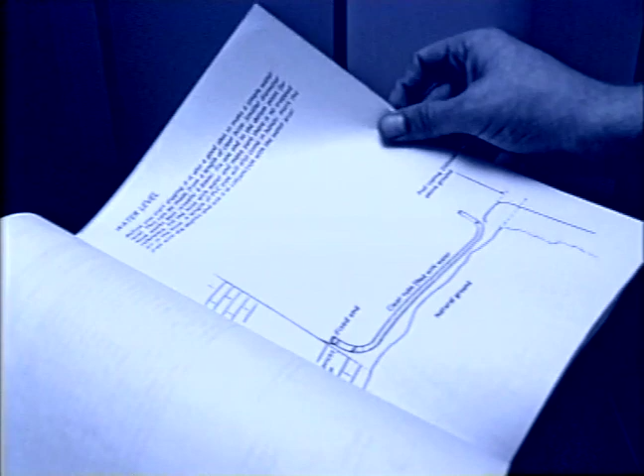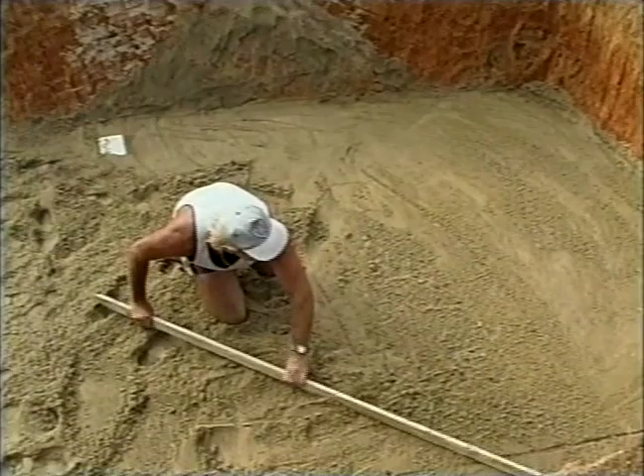Do-it-yourself pool installation is made easy with Narellan Pools kit installation booklet and video. The booklet is an easy-to-use step-by-step guide with comprehensive technical information that covers the main aspects of pool installation. The video is a visual aid showing you a real pool installation and highlighting the techniques used during each stage of installation. Remember, if you get stuck and need advice, we're only a phone call away.

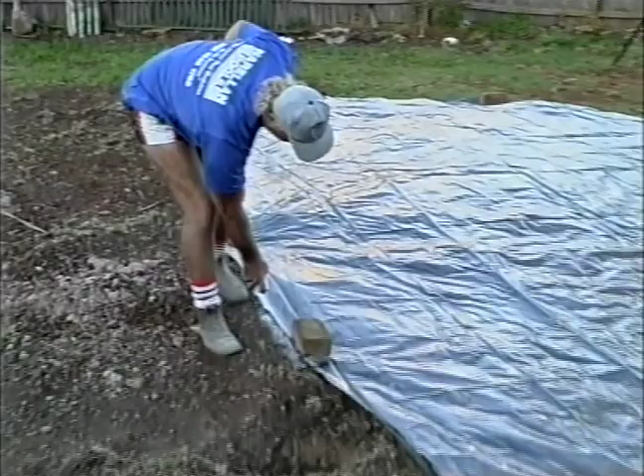Firstly, decide where you would like your pool. Prepare the site by levelling the area and then lay out the pool template. Mark the position of the template using white paint or by spreading lime around the edge. This is so you know exactly where to dig. Measure all your levels with a dumpy, laser level or water level, all of which achieve the same result.

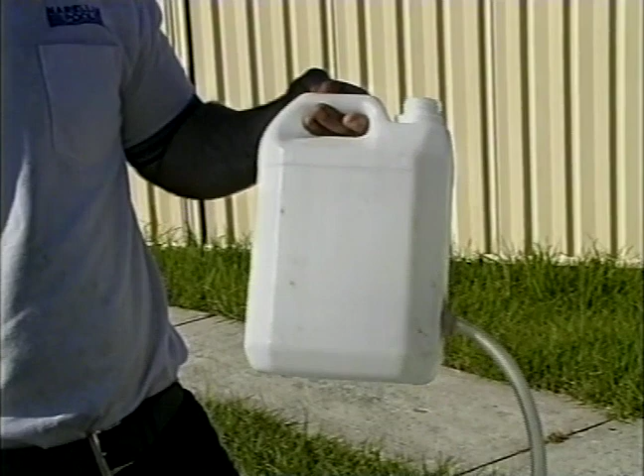To make a water level, you'll need two things: a clear plastic bottle or container and a 15-metre length of 5 to 10 mil diameter clear hose. Connect the hose to the container and fill it with water. Using coloured food dye in the water will highlight the water level in the clear tube and make it easier to see.

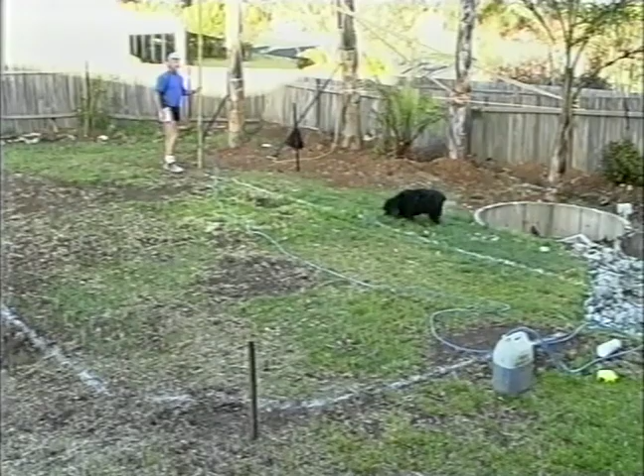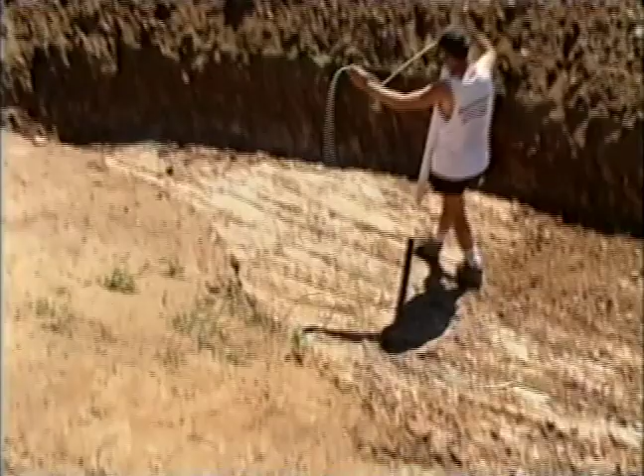You'll notice that wherever you take the clear hose, the water level will be the same as it is in the container. A length of PVC pipe will also come in handy. Use a tape or a texter and mark the shallow and deep end dig depths on the pipe. Use the pipe along with the water level to check your dig depths during excavation.

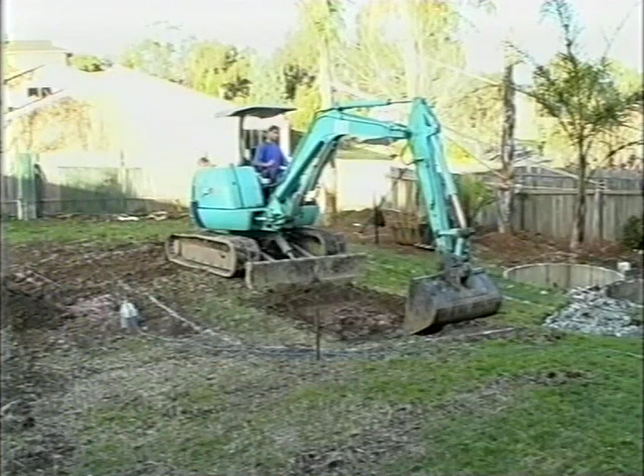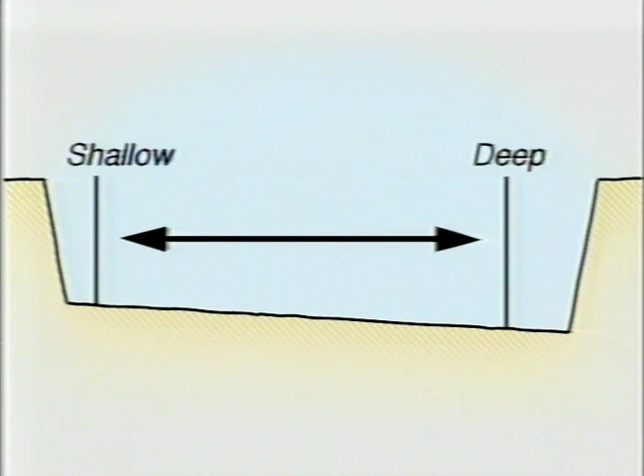For your pool coping to be level upon installation, your excavation must have the correct slope from shallow to deep. To achieve this, the distance between the shallow and deep end dig depths must be correct. The distance between these 2 points is called the pool floor measurement. You can find the correct pool floor measurement for your pool in the installation booklet.

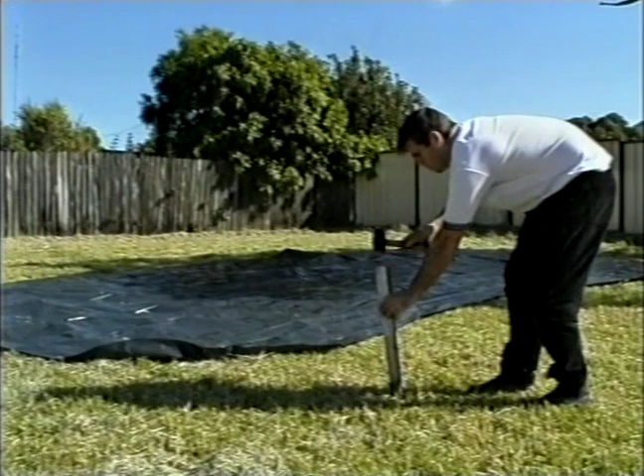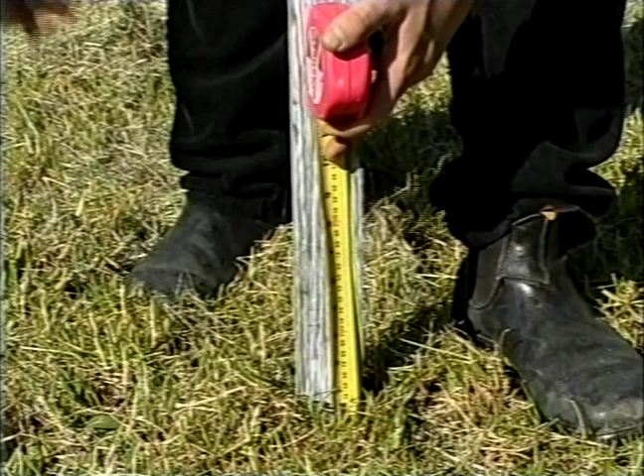Hammer 2 pegs outside the excavation area to mark the shallow and deep end dig depths with the correct distance between the 2 pegs. Before you start digging, you'll also need to establish a finished height for your pool coping. Keep the pool coping height at a minimum of 150 millimetres above natural ground level to avoid any possible drainage or hydrostatic problems in the future.

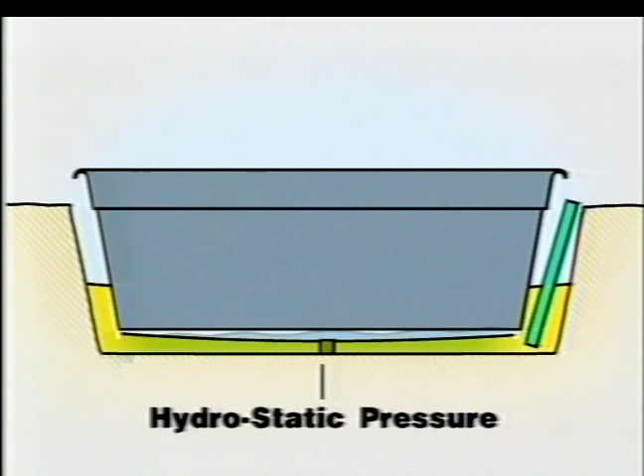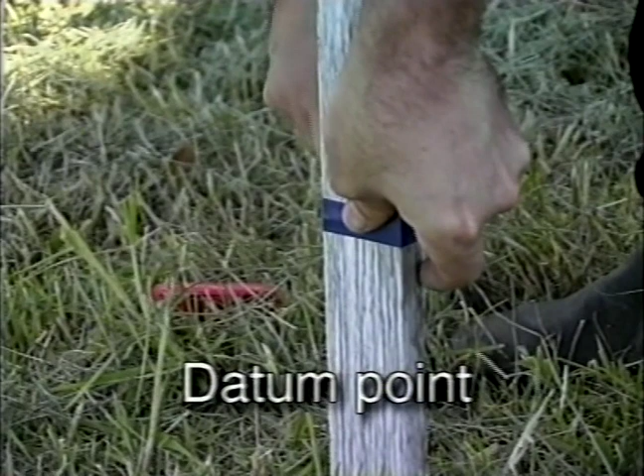Mark one of the pegs you are using for dig depths with the finished height. This is called a datum point. Refer to this point when checking all measurements and levels to ensure consistency and accuracy throughout your installation.

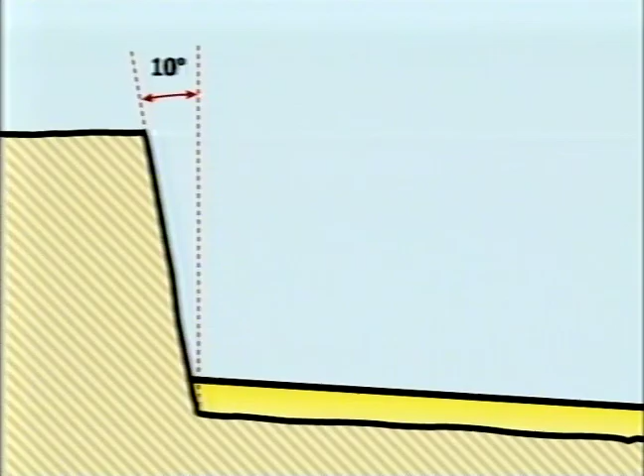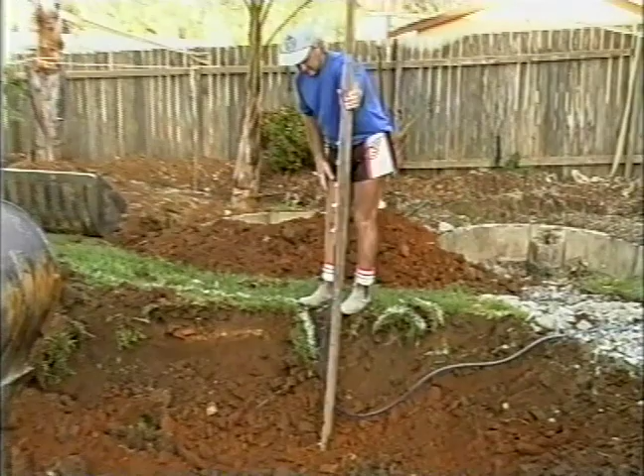To allow for the gentle wall slope of the pool, your excavation should also have a taper of about 10 degrees to eliminate the need for extra backfill. Allowing for the internal steps and ledges will also help. Using the painted outline as a guide, you are now ready to start digging. And remember, check your dig depths often during excavation.

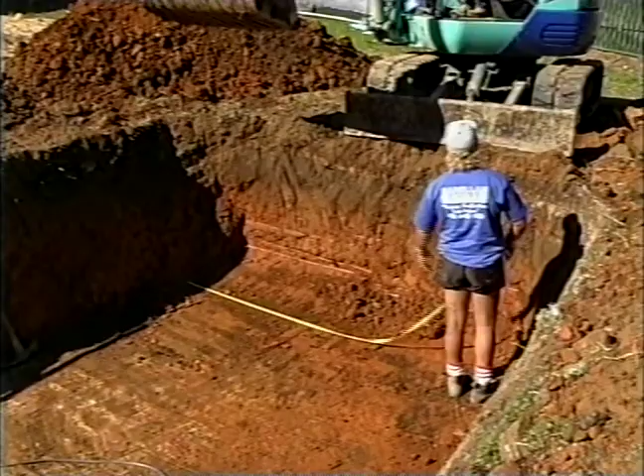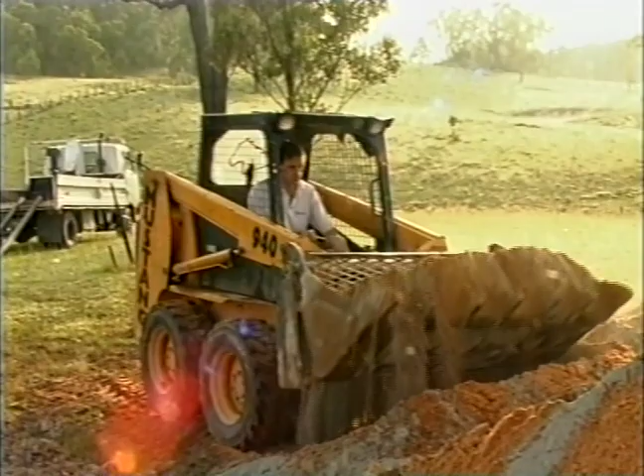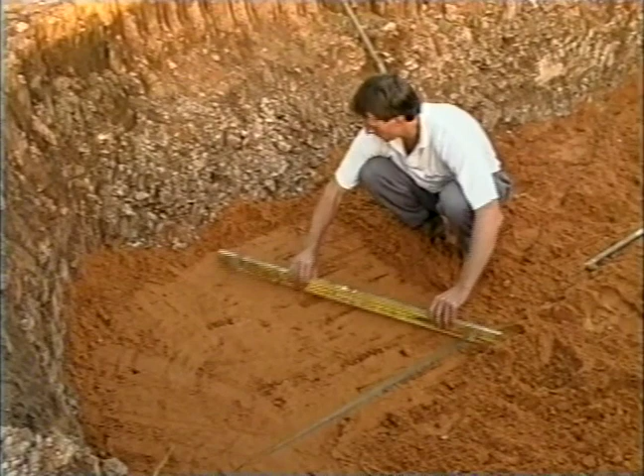With the excavation complete, it's time to do the sand bed. A non-fatty washed river or coarse sand is recommended for the sand bed and backfilling because of its drainage qualities. You can also use crusher dust if available. Your pool will sit directly on the sand bed, so it's important that you screed your sand bed at the right level. If you've over-excavated, you can build up the sand bed to compensate and achieve the right level.

Place a length of 4x2 timber through the centre line of excavation at the correct level from shallow to deep end. Using the timber as a guide, screed the sand to a level surface. Keeping the sand bed 150 millimetres above the correct dig depths will ensure your pool is the minimum 150 millimetres above the ground level. A 50 millimetre concave falling to the timber guide is desirable. This will eliminate the pool floor lifting from any hydrostatic pressures in the future.

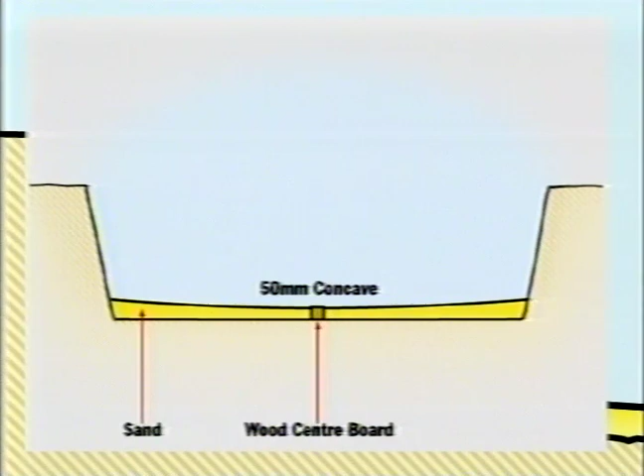Remove the centreboard when you're finished and fill the gap left with sand. When you're finished, check there are no dips or bumps in the sand bed and that all levels are correct.

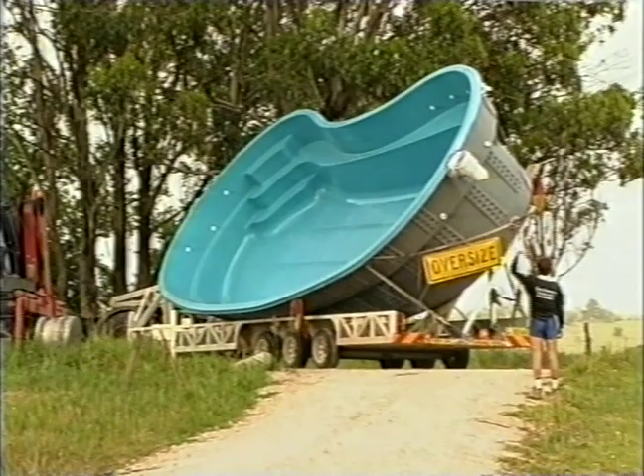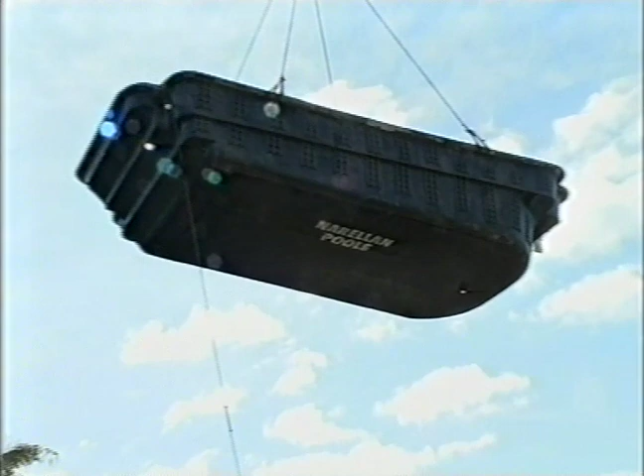Placing the pool in the excavation can be done in one of two ways. If there's enough access, our truck driver may be requested to place the pool directly into the excavation using the Hiab crane on his truck. If utilising a high-lift crane for your installation, refer to Narellan Pools for lifting procedures to avoid damaging the pool shell. Lower the pool into the excavation in the correct position.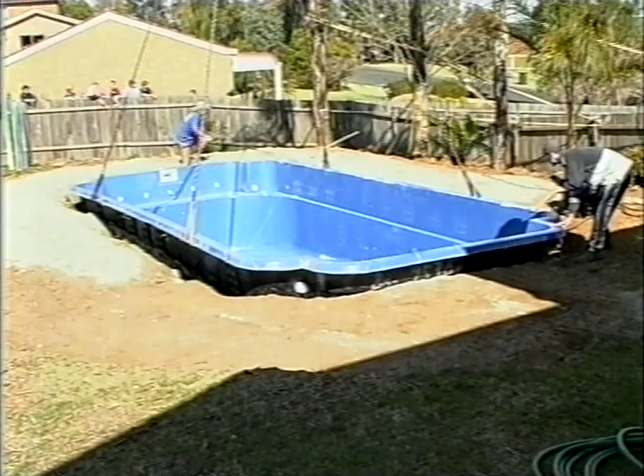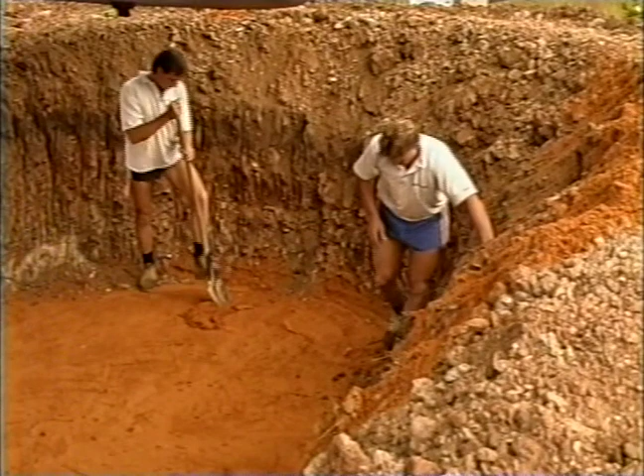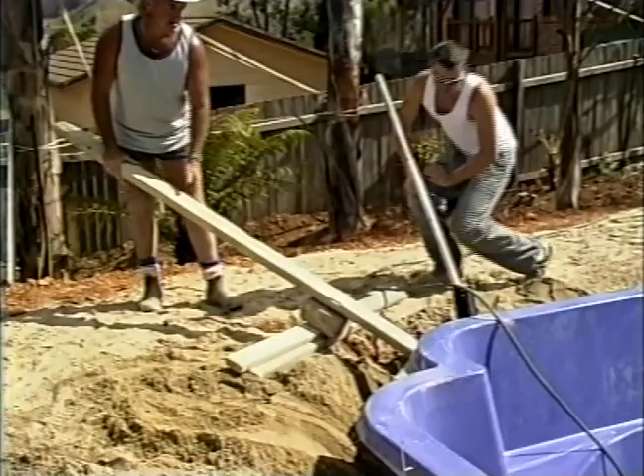Allow the hydrostatic assembly to touch the sand bed. The hydrostatic valve protrudes from the bottom of the pool and will leave an impression in the sand bed. Lift the pool and use a shovel to remove this section of the sand so that the protruding assembly sits into the recess and the pool floor is flush on the sand bed. If your pool is not level upon installation, use a length of 4x2 timber under the pool coping to lever up the corner, using other timber between the pool and the lever.

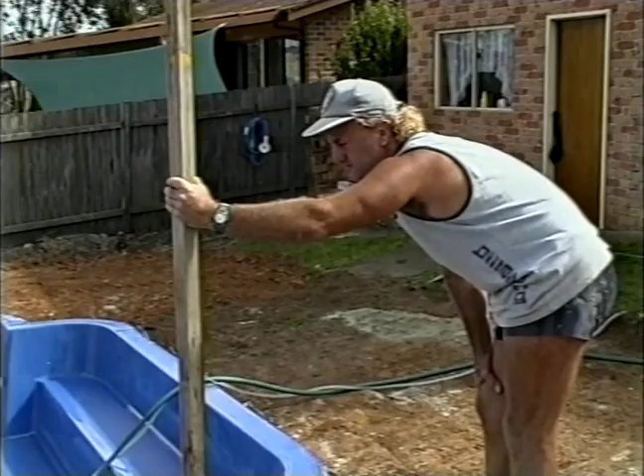For example, if the pool is low by 25mm in one corner, lever the corner up 35mm and place a shovel or two of sand under that corner. Do the same on any subsequent corners until the desired level is achieved.

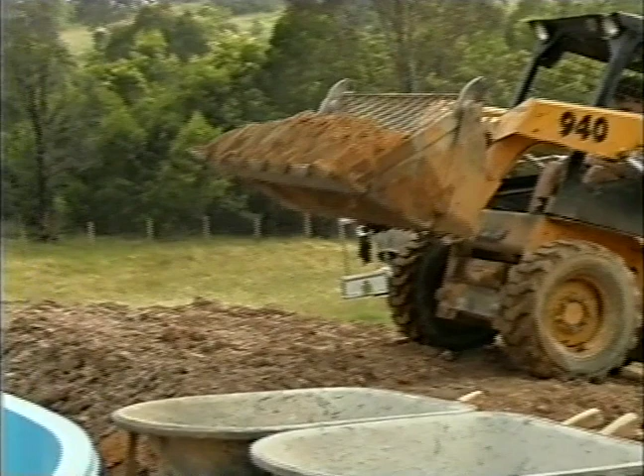The pool shell is stabilised by backfilling with a dry mix of sand and cement. The sand and cement mix is usually 10 parts sand and 1 part cement. Mixing is usually done on site by a bobcat, cement mixer or other machine. It's also acceptable to manually mix cement into the heaped sand if you increase the amount of cement by about 10%.

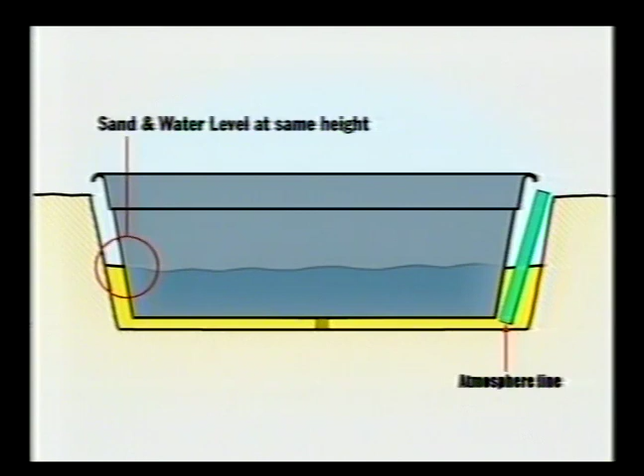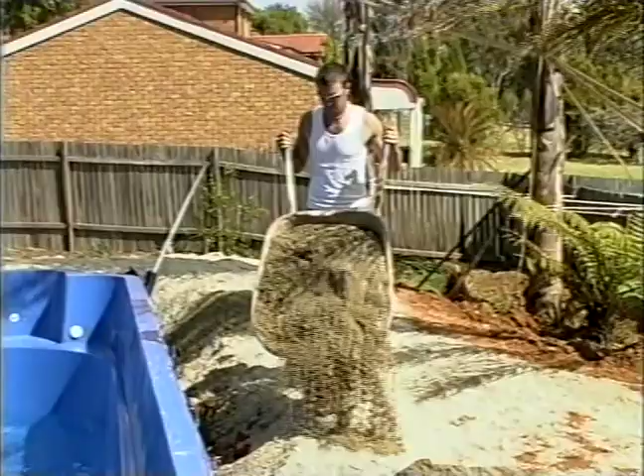For best results, keep the water level inside the pool and the backfill around the outside of the pool rising at the same rate. Check the pool coping for level every 15 minutes until the pool is about a quarter full and regularly thereafter, adjusting if necessary. In preparation for your concrete bond beam, finish backfilling approximately 150mm below the top of the coping.

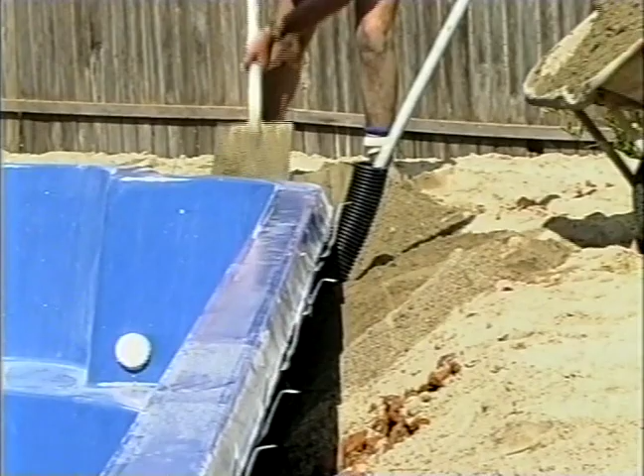The atmosphere line is used to gain pump access or to siphon any groundwater that may be present around the outside of the pool. Before pumping out any water from your pool, always check the atmosphere line and remove any water that may be present to avoid damaging your pool.

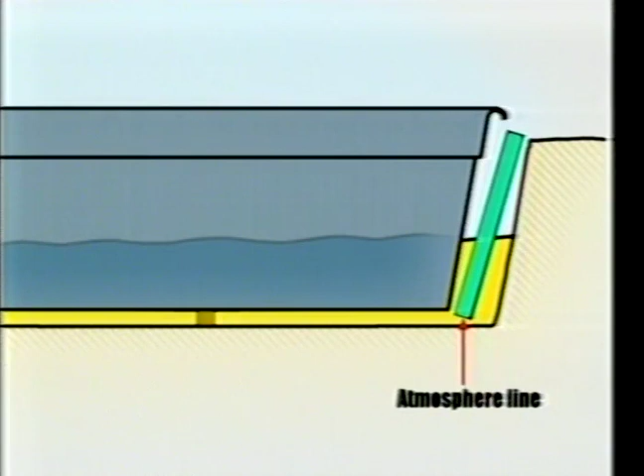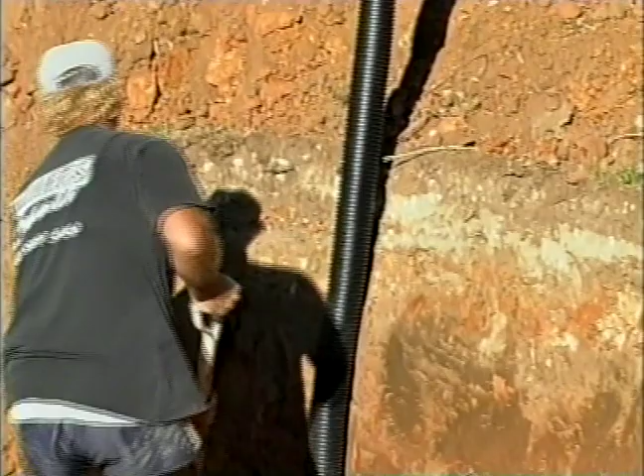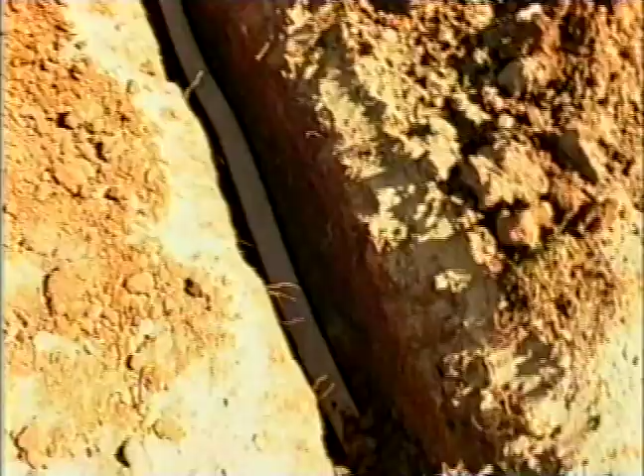The atmosphere line is a standpipe installed at the deep end of the pool, running from the bottom of the sand bed straight up through the backfill to the outside of the pool coping. 100mm ag pipe is used for the atmosphere line and is wrapped in geotextile stocking, and when concreting, place a concrete style drainage grate on the top of the pipe. If you're on a sloping site, additional subsurface drainage will be required. Refer to your installation booklet for further drainage information to suit your site.

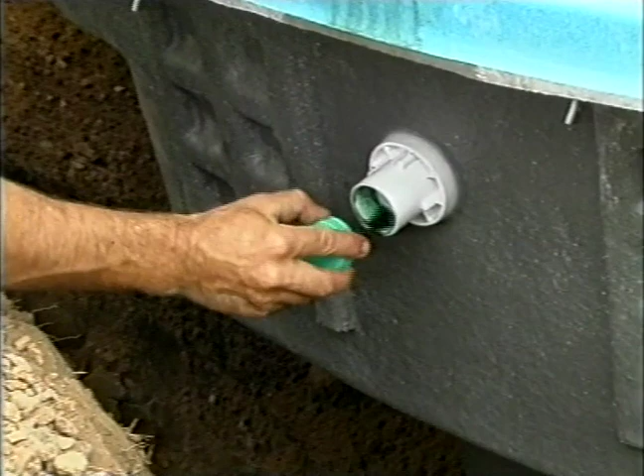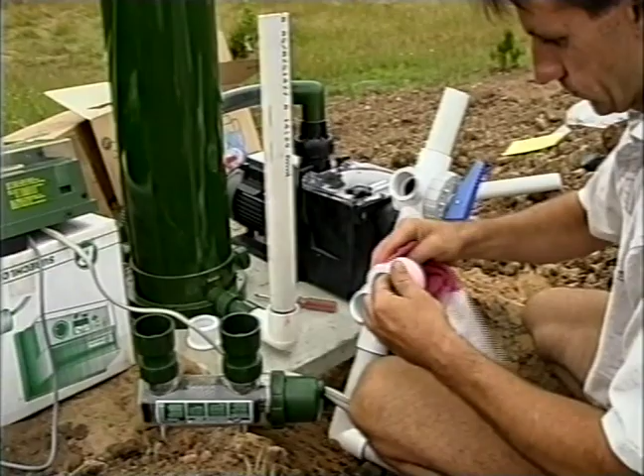Once you have partially backfilled the pool, connect the suction and return lines, spa jets and solar pipes. Finish backfilling once this has been done. It's a good idea to place your filtration equipment on a stable base, such as a concrete slab, and when connecting the pipework, use red primer and blue or green coloured glue. This is so you don't miss gluing any joins.

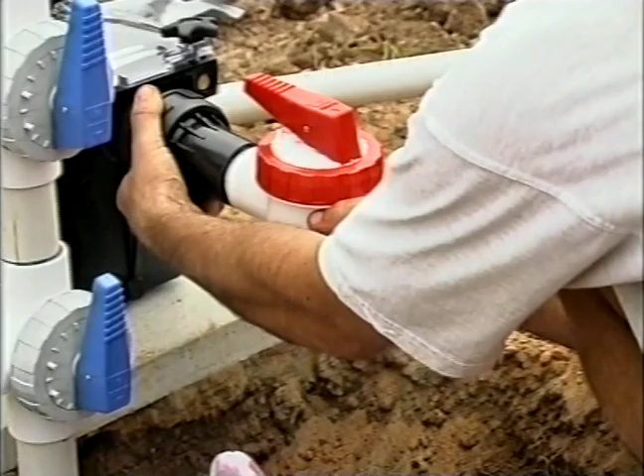When the pool is full of water and the suction and return lines have been connected, allowing at least 2 hours for the glue to dry, turn the filtration system on and check that there are no leaks in the pipework from the filtration to the pool. Plumbing diagrams can be found in your installation booklet, along with more helpful hints on how to plumb your pool.

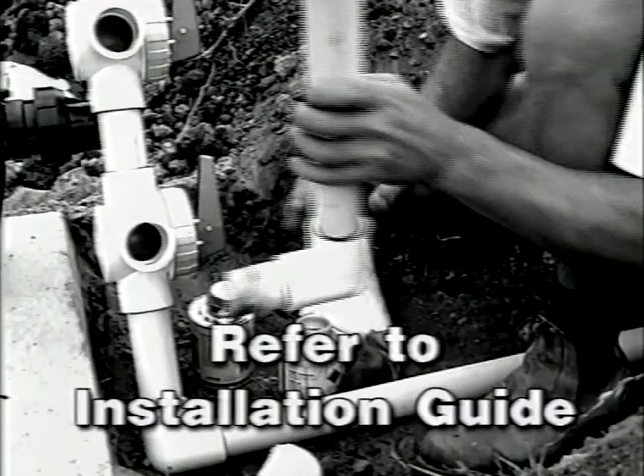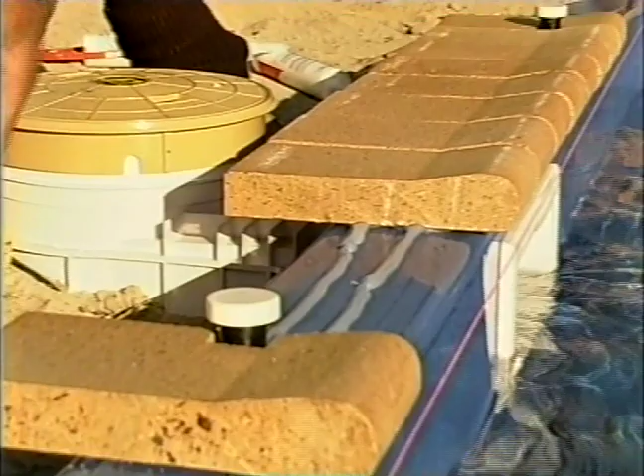This is an integral part of your pool. Several finishes can be achieved, and these are purely personal taste. Paved copings are popular, and if this is your choice, pave the pool coping before concreting. If you're using clay pavers, the correct adhesive is V2 Z-Bond Acetic Cure Silicone. If you use cement pavers, V2 Neutral Cure Silicone is the right stuff.

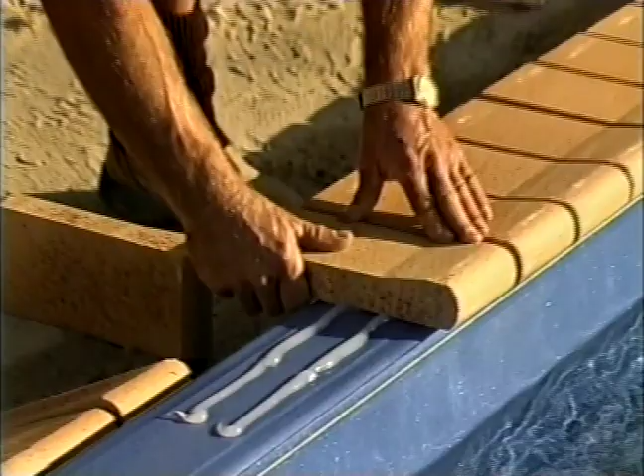When you grout your pavers, you must incorporate an expansion joint about every 3 metres by using silicone between the pavers instead of grout. Use a foam expansion joint between the back of the pavers and the concrete bond beam to protect the pavers from concrete expansion.

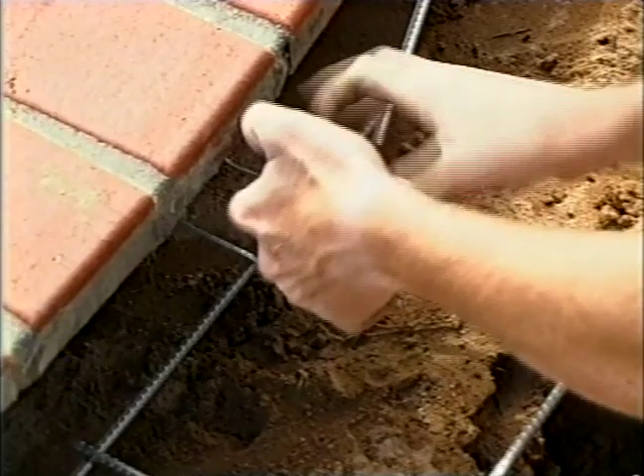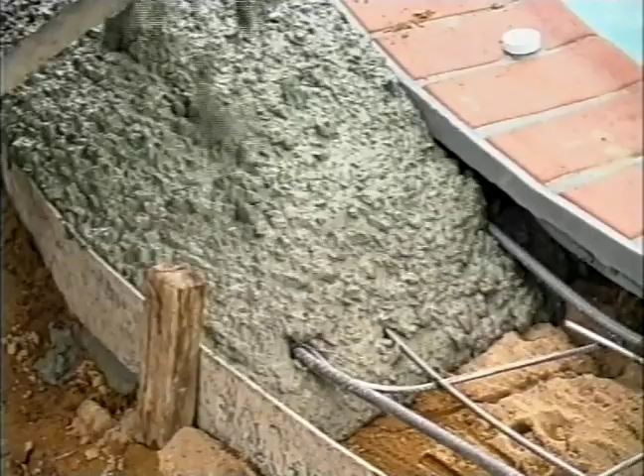The concrete walkway around the perimeter of the pool is called a bond beam because it must be bonded to the fiberglass shell. This stops the pool coping from moving or distorting. Steel reinforcing is used in the concrete bond beam, and the steel is tied to the shell using the metal ties already on the side of the pool. This and tucking the concrete right under the coping is what ties the pool shell to the bond beam. Engineer specifications for your concrete bond beam can be found in your installation booklet.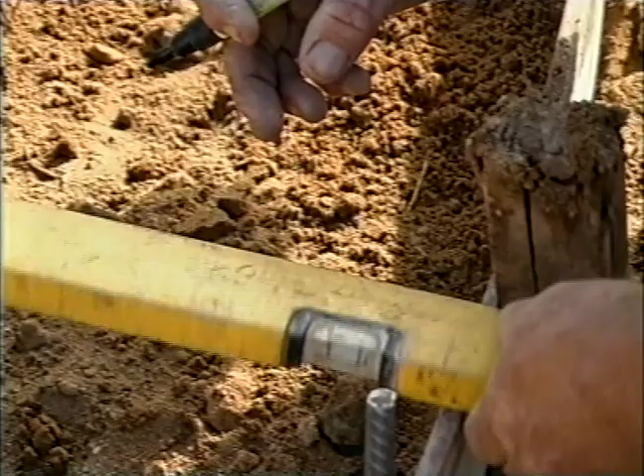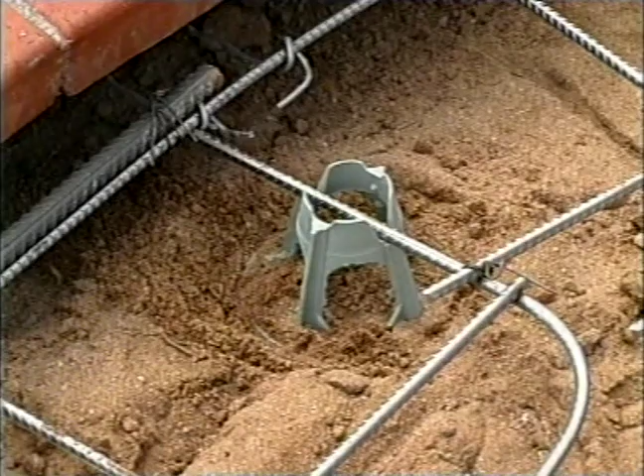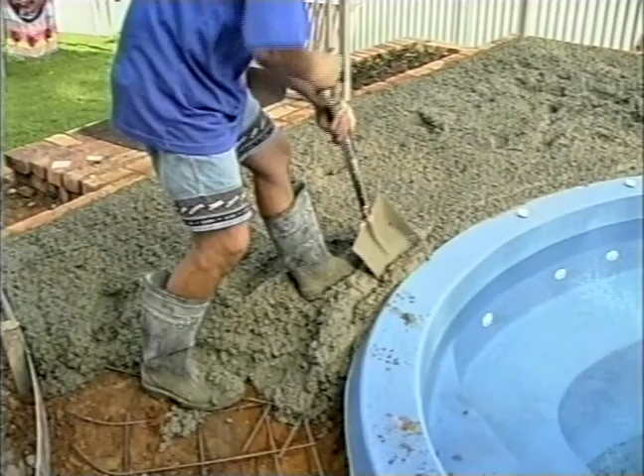Use a spirit level when constructing your formwork and allow about 20mm fall in the bond beam towards the outer edge to help with drainage. Use chairs to lift your steel up off the ground and make sure the steel is tucked right up against the pool wall. When pouring the concrete, it's vital that you tuck the concrete right up under the coping, and it's worthwhile spending extra time to do a good job of this to prevent future problems of pool and bond beam separation.

All our pools have children's safety ledges which allow kids to walk from deep to shallow water or just catch their breath. Non-slip step treads on the pool coping, steps and floor make Narellan Pools safe for young and old. Non-abrasive curves, steps and corners prevent gravel rash, cuts and bruises. Peace of mind for every mum.

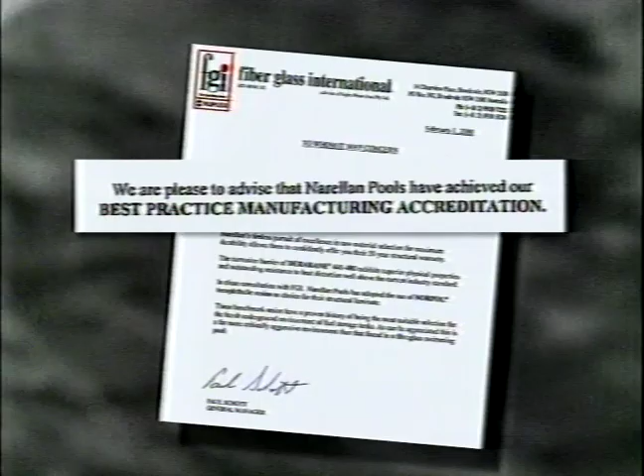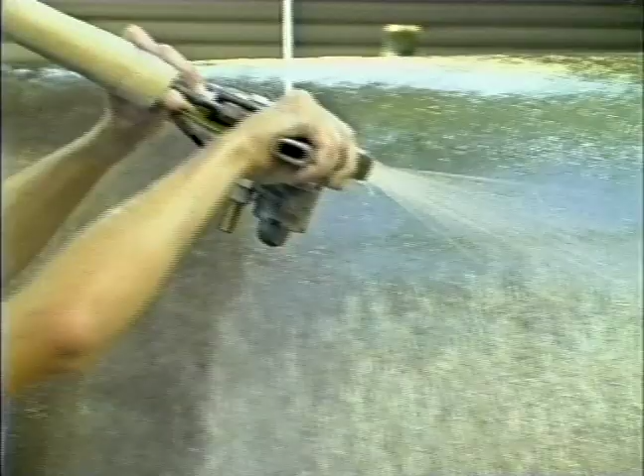In fact, Narellan Pools are up to 25% thicker than the industry average, with extra reinforcing around steps, swim outs and around the lifting lugs. Narellan zealously protect a unique status of having achieved Best Practice Manufacturer accreditation from FGI, Australia's oldest and largest supplier of thermoset resins. You're assured we use only the best quality materials available, and we use blister-proof vinyl ester resins in each and every pool we make. Fantastic fiberglass is strong, tough and flexible, making it hard to damage and easy to fix.

Fiberglass is easy to clean and keep clean, requiring minimum maintenance and chemical additives because its surface is pH neutral, and that means it's cheap to maintain. For around $250, you can keep your pool safe and sparkling all year round. For these reasons, you'll be glad you chose a Narellan Pool.